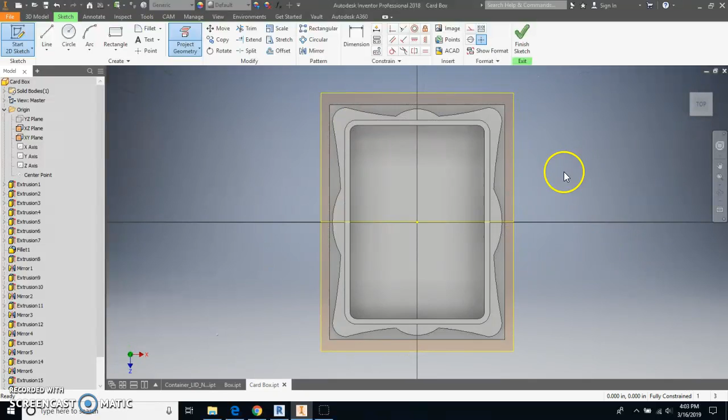Now, what I want to do, the last thing, just to add one more detail, I'm going to go to this top surface right here. I'll zoom in on this side, and I'm going to draw a circle right at the midpoint of that thing. I'm going to pull this out, and this is where you have to start thinking about the size of the tools that I have. I want to do just a simple drilling operation here with an end mill, and I want that end mill to cut just a straight drill down in.

So I have a 1/2 inch tool, which gives me a 1/4 inch radius, and I'm going to be doing a lot of work with the 1/2 inch tool on this part. So I could make this a 1/2 inch diameter circle with the 1/4 inch radius. I have a 1/4 inch tool, which would give me an 1/8 inch radius. So it's just kind of a what I like type of thing. So I'm going to put in a 0.25 diameter, which means I'll end up with a 1/8 of an inch radius. So when I go to cut this, I will use the 1/4 inch tool.

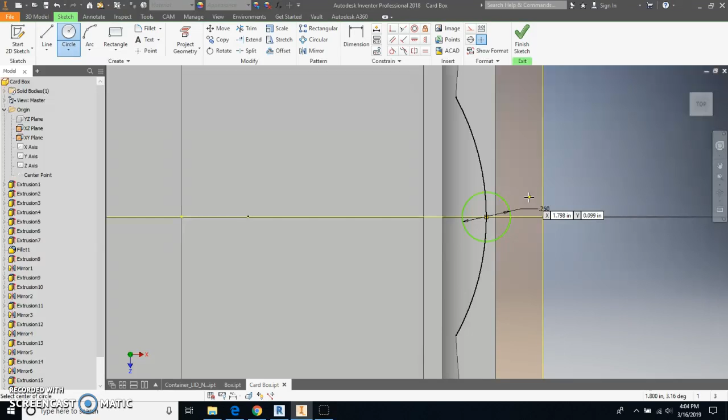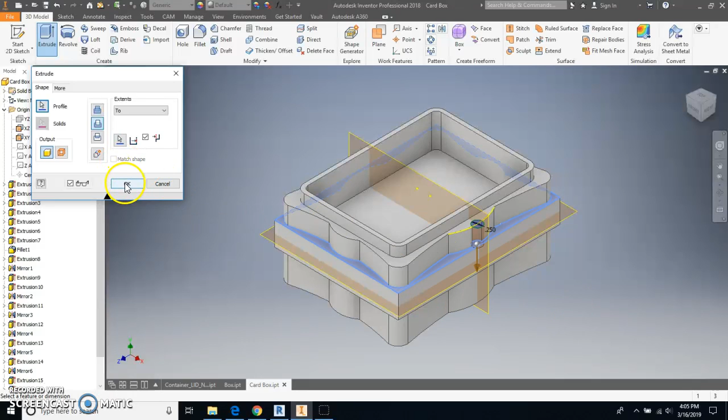And what I'm going to do is finish my sketch. I think this is going to work out. I'm going to extrude that. It's going to be a cut, and the distance is to the surface. And if I say OK, what do I got? That's what I got.

Now, again, just like before, mirror tool, here we go. Feature, that one. Mirror plane, that one. We'll say OK. Just double check, make sure it's there.

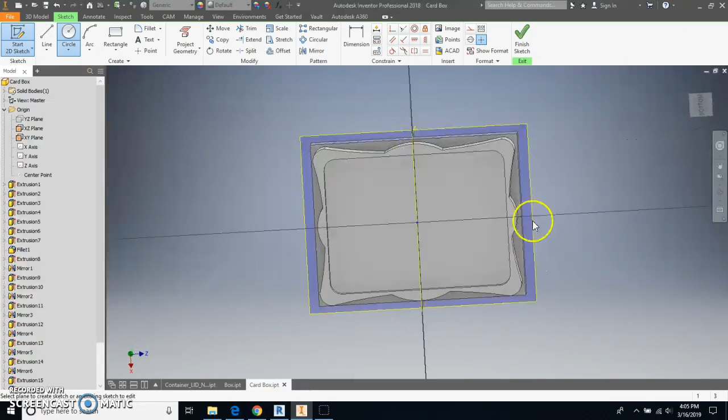It is. And now on the bottom, we'll do a 2D sketch. And I'm going to use project geometry. You can see I just put my cursor on here. I know about where that thing is, so I just touch it, and there it goes.

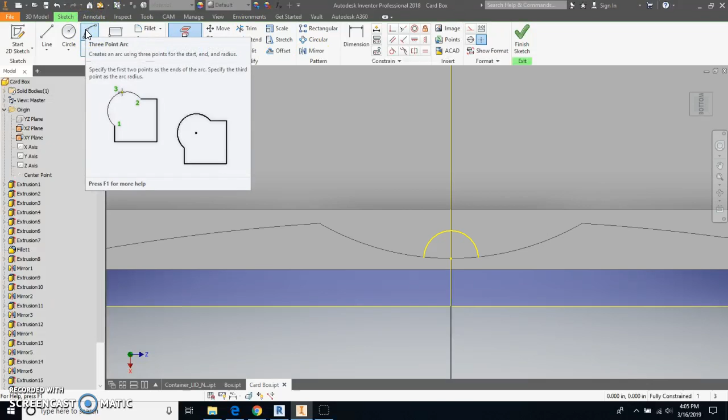And I'm going to need to do, let's see, I think I'm going to need to do the arc here. I'm going to go to the end point there, to the end point there, to the center point there. Same thing at the top. Arc, end point, center point, and I should be okay with this.

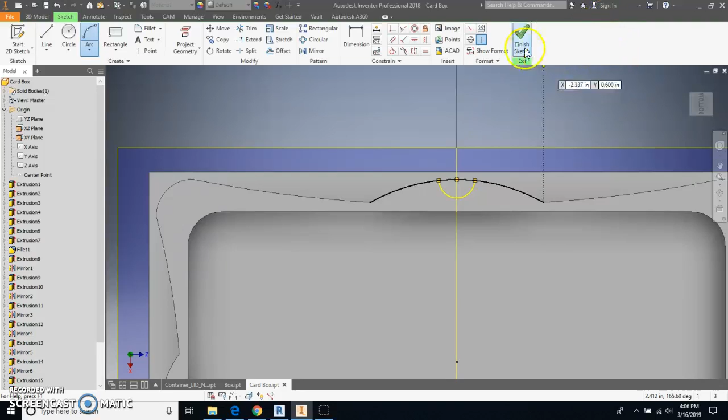Go away, save a reminder. Finish sketch. I'm going to extrude that one there. It's going to be a cut to that surface. Okay.

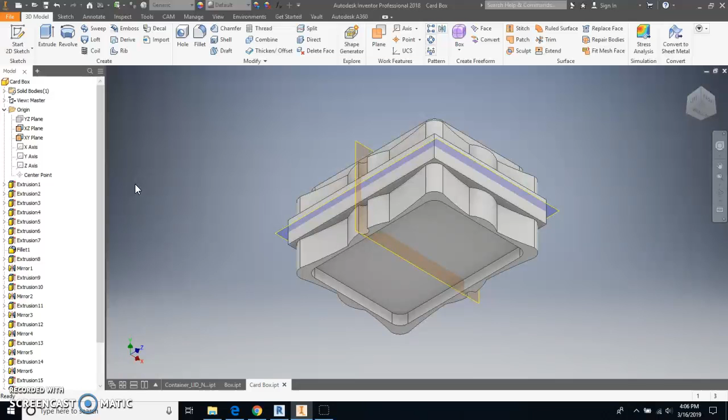So that should pretty much finish up the part. As far as I'm going to go with it, you can do more things to it that you might like. And I'm all set.